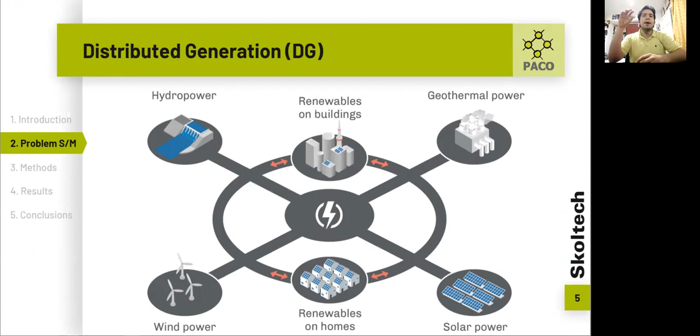So everyone knows that the traditional power systems are constructed in a unidirectional way. So the delivery of energy is made from the generation centers to the demand centers. But now the distributed generation has driven a change in the current power system topology. The new power system has a bidirectional exchange of energy between the demand and the generation.

And the first question that we want to answer is where we should place the DG units within the distribution. And of course, the decision of which node to connect the DG unit is according to some technical requirements and trying to optimize an objective.

And additionally, we want to answer a second question: what would be the size of this connected distributed generator? As you can see here, this is a capacity problem for the system plan. How much capacity and where should I connect in the system? That is the question that we want to answer.

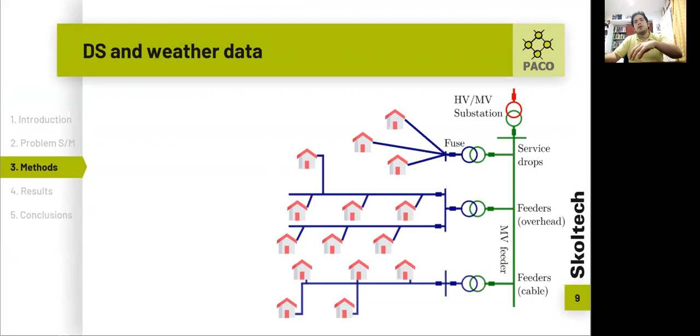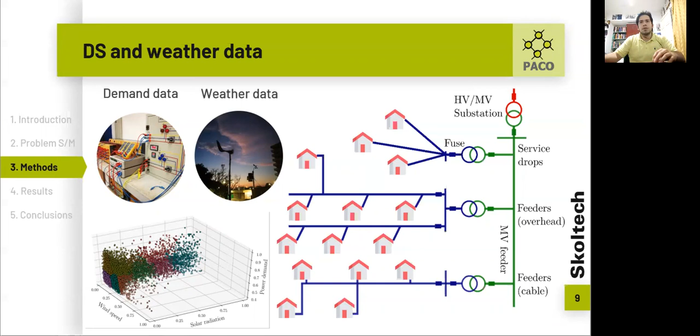And now let's talk a little bit about the problem statement. The distribution system is the final step in the delivery of electrical power and connects the transmission system to the individual consumers. In this work, we face this problem taking into account some uncertainties. The idea is to use historical data from a weather station and a power meter located at the feeder and create a database with hourly measurement of power demand, wind speed and solar radiation.

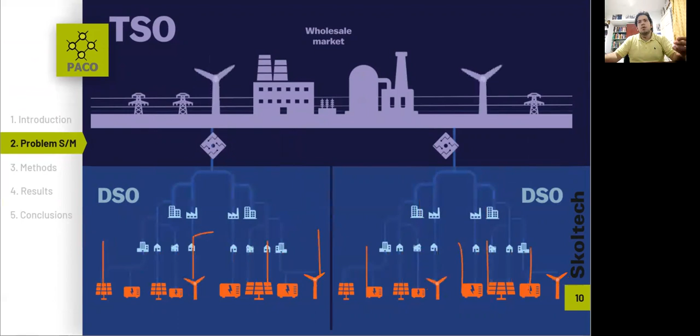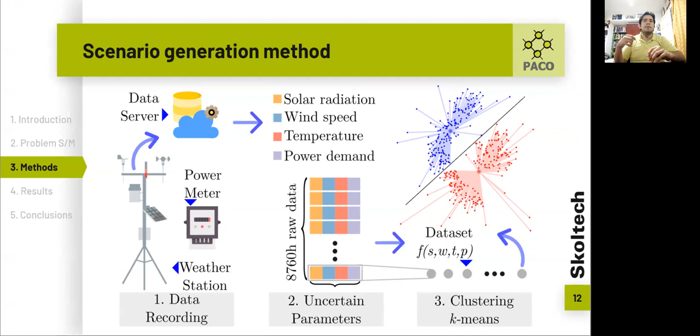As you can see here, the solution is what kind of technology we are using and also which will be the node where we are connecting these DG units. We can now talk about the methodology and the approach used, starting with the scenario generation method. We are using the K-means technique to group a collection of historical data. The idea here is to determine a scenario level with the info about the demand, solar radiation, and wind speed.

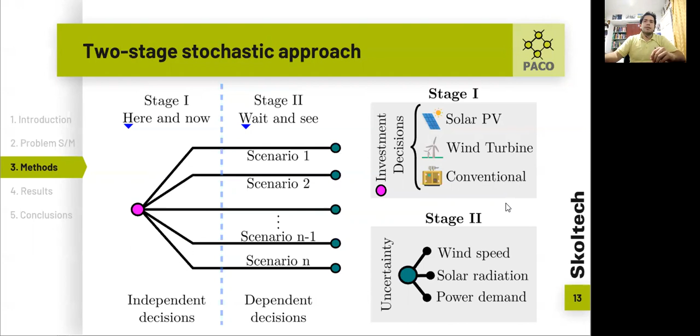And then we use a two-stage stochastic programming to formulate the problem of DG allocation. We have a first stage with investment decision, considering three technologies: the photovoltaic PV system, wind turbines, and conventional generators or small diesel generators. And the second stage is taking into account the uncertainty in the system.

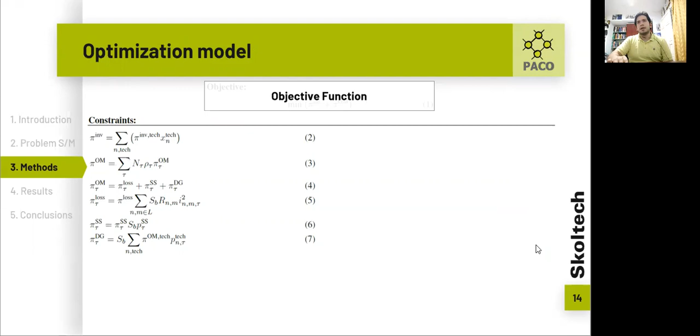And we have here the optimization model sketch. We have an objective function taking into account the investment decision. We have some constraints defining the investment cost and the operation and maintenance cost. We have the power balance constraint, and also some engineering limits: the voltage, maximum power delivery. We also have some relaxation because we have a bilinear product in the apparent power equation. And finally, the budget constraint is defined here.

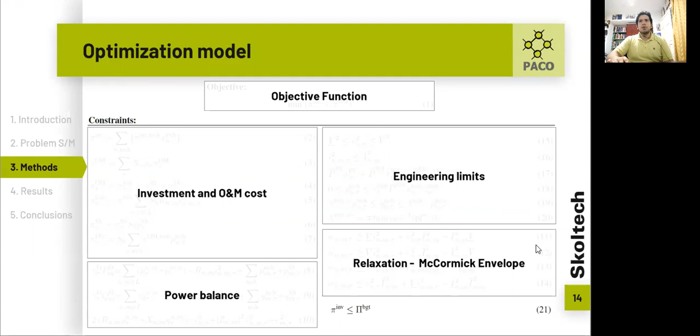And in this problem, we want to analyze the quality and the stability of the solution. Our investment problem formulation can be compactly summarized as a classical two-stage stochastic program. The vector here represents the investment decision, and the vector y represents the operational decision at the second stage.

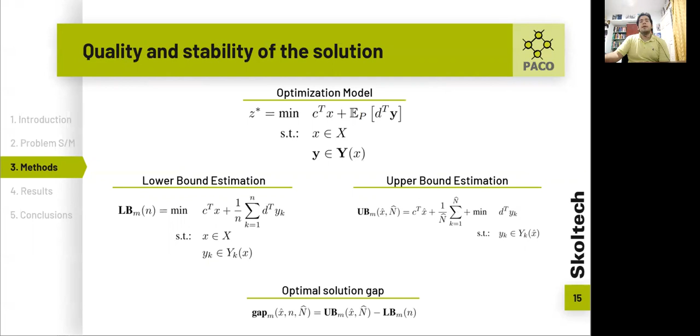We can estimate the value of the lower bound using N replicas and we can also estimate the upper bound using a fixed value, denoted here as x hat. And we can estimate the optimality gap, taking the difference between the upper bound and the lower bound in the different solutions.

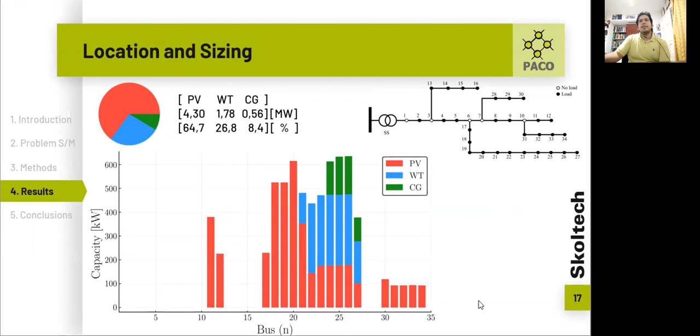Let's talk about the results that we obtained. The solution for a realization is the DG units located in different nodes, with a mix of different technologies, for example, the PV units, the wind turbines, and the conventional generators. And now we are taking different numbers of scenarios. The results are as follows.

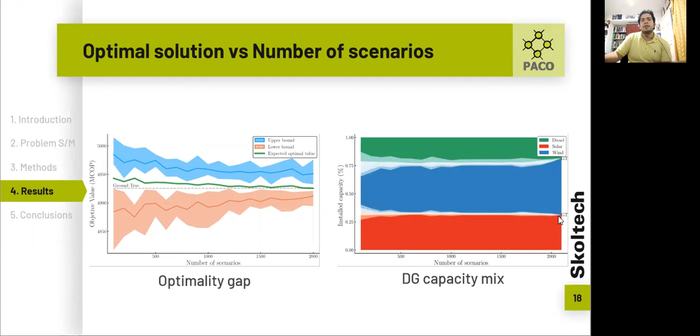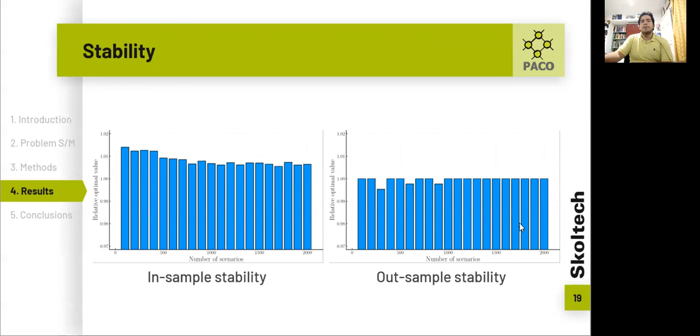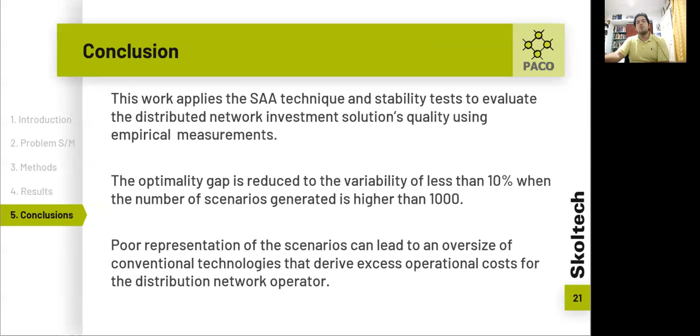We can conclude that the solution satisfies the criteria of in-sample and out-of-sample stability when the number of scenarios generated surpasses 1,000 data points for this particular distribution grid.

As future work, we can evaluate different scenario generation techniques, maybe include some storage devices like electric vehicles, and maybe implement a long-term planning horizon.